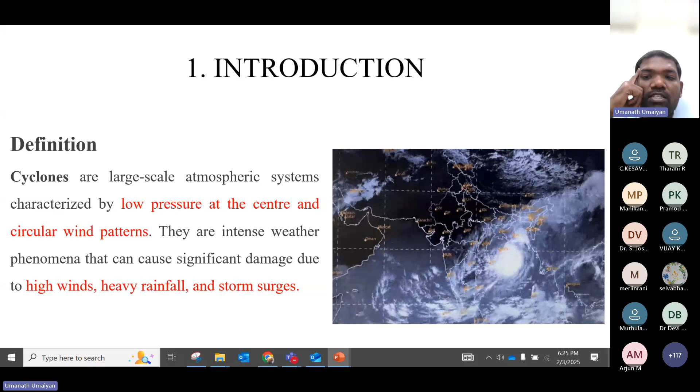This intense weather phenomenon causes significant damage due to high winds, heavy rainfall, and storm surges. The basic is wind, but the byproduct of the cyclone is heavily induced by these three: high winds, heavy rainfall, and storm surges. These three phenomena damage most structures, and we have to think of all three parts from a geotechnical aspect. This is the basic characteristics of a cyclone.

Let me start with formation and dissipation - how it starts, how it's forming, how it is dissipating. Mostly cyclones happen in tropical oceans, meaning where the temperature is mostly more than 26 degrees. Where the temperature is more, there will be evaporation of air.

The pressure of air will go up to the atmosphere, where the pressure will be very low. Where low pressure happens at the top of the tropical oceans, it derives heat and moisture from the oceans. It starts to form as a tropical cyclone, and moves around, dissipating over cooler areas. Wherever it moves to cooler places, you may expect huge rainfall.

So it gives heavy rainfall - imagine, it can give up to 500 mm of rainfall, which will definitely cause flooding and landslides, and storm surges - a rise in sea level. With very forceful and heavy wind force, it will move the waves and make the sea level rise. That is another catastrophic effect.

The low pressure at the center, as I mentioned, is called the eye, and it's surrounded by the eye wall. That is the reason it causes intense wind and rainfall - that's an important point. High wind speed can reach up to 250 km per hour at maximum. Just imagine a 250 km per hour wind attacking your structure or any other material.

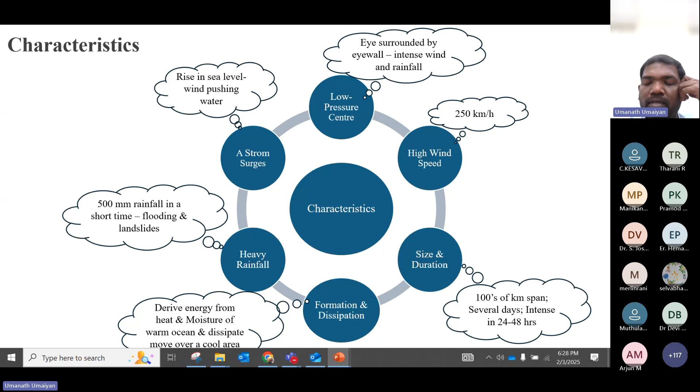Now let us go to the historical damage to structures. I cannot go beyond 50 years back, but just imagine, in the last 50 years alone, India has faced 117 cyclones, which took around 40,000 lives.

So what are the impacts of cyclones? Let us see stage by stage. First, it causes structural damage due to high winds and flying debris. You can see a lot of videos on YouTube and in newspapers and news channels showing heavy wind creating debris that can destroy buildings, bridges, and other infrastructure. That is the main structural damage.

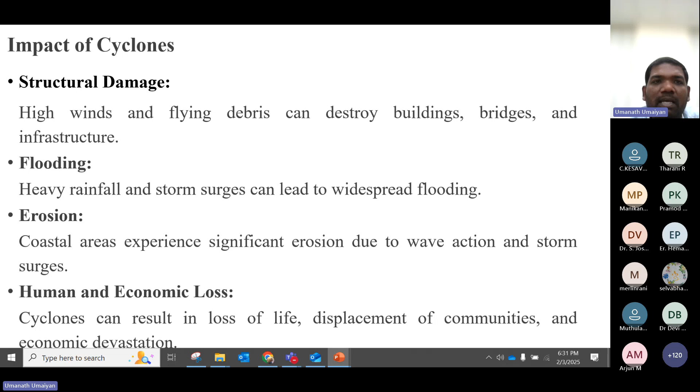So having covered the basic introduction of the cyclone, its characteristics, and its impact, let us move to the technical part: the geotechnical relevance of cyclones. If you hear the term cyclone, everybody thinks of high wind force and heavy rainfall damaging structures, but nobody thinks about how it also affects the subsurface, that is, the foundation or geotechnical aspect. So I am presenting here the challenges imposed by cyclones on geotechnical design.

It starts with uplift forces on the foundation due to heavy winds. In the picture on the right, you can see a transmission tower resting on piles, shown here as a single pile, though in practice there are pile groups too. Because of heavy wind, the transmission tower gets laterally displaced. Due to this lateral displacement, one side of the pile gets settled while the other side gets heaved, because one side is affected by compression and the other by tension. This uplift force acts on the foundation, and if it is not designed for, the transmission tower will fail.

The second important point is liquefaction of soils during heavy rainfall. I'm not sure about the domain of attendees here—probably most people are coming from a structural background and don't understand the terminology called liquefaction. This is a specific term we use in geotechnical engineering, so let me dwell on it in more detail, because I want everybody to understand this very important challenge posed by cyclones: liquefaction of soils during heavy rainfall.

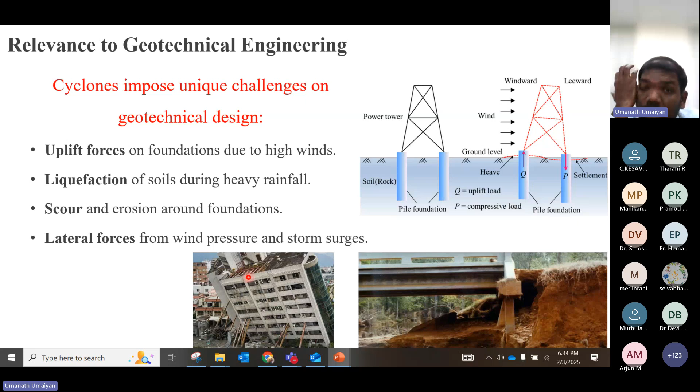The fourth point is lateral forces from wind pressure and storm surges. Any structure that doesn't consider lateral forces—whether a tall structure or any kind of superstructure—will impose uplift or lateral forces on the foundation system. So these four points are the challenges imposed by cyclones in geotechnical aspects.

Let us see one by one. First, to know the impact on geotechnical aspects, let's go back to the types of soil. People might already know the types of soil, but let me brush up the basics. Soils can be defined in the categories of coarse grain soil and fine grain soil.

Any particles retained on a 4.75 mm sieve, meaning more than 4.75 mm in size, are called gravel—we don't bother about that. Geotechnical engineering, or rather soil mechanics, only concerns soil particles passing 4.75 mm. So from 4.75 mm down to 75 micron, it is called coarse grain soil, and here the shear strength is defined by friction angle.

Most particles in this region could be called sandy soil. This sandy soil can be bifurcated into many types: sandy soil, clay soil, poorly graded sand, well-graded sand, silty sand, clayey sand—lots of bifurcations exist. But for now, let me give a broader classification; this much is good enough. So the shear strength is defined by the friction angle. Here is an important point.

Since you're mostly from a structural background, you know about concrete and steel. Concrete is good in compression but very bad in tension. Similarly, steel is very good in tension but bad in compression—meaning each material fails under a specific type of force. Concrete fails by compressive force, meaning axial load, and reinforcement fails under tensile load. In the same way, any type of soil will fail in shear failure, meaning horizontal movement between soil particles, which creates stress until the soil fails beyond a certain point.

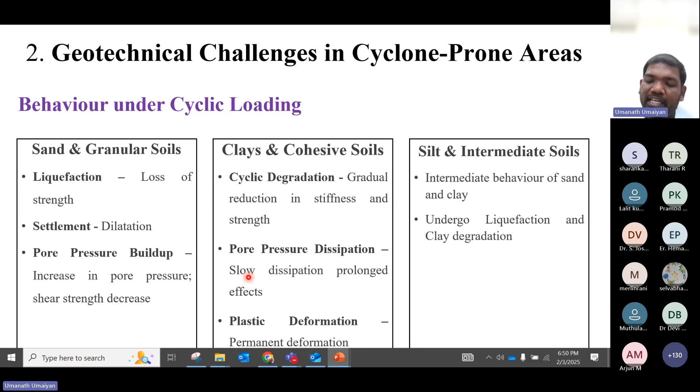Okay, so as of now we have seen the types of soils and their behavior under cyclic loading. As I promised earlier, I am going to explain more about the liquefaction factor here, because this is the point that most structural background people aren't aware of. Fine, so this is liquefaction.

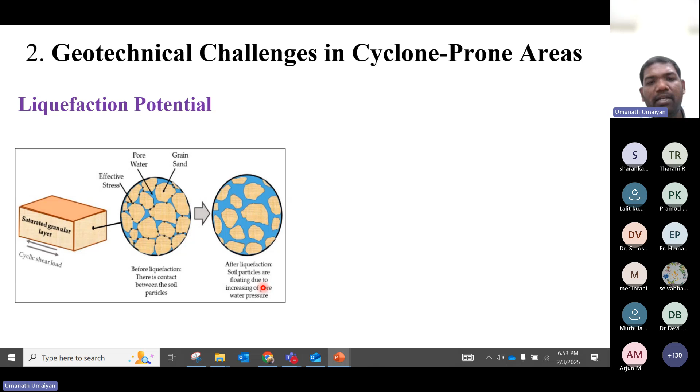Soil particles are floating due to increasing pore water pressure - these are the words I have mentioned. The soil is saturated and filled with water between the voids. During a strong cyclic load, these waves will compress the soil strata. During the cyclic load, all the soil particles try to compress each other because of this wave action. So due to the compressive force exerted by the earthquake waves, loose soil tries to densify, obviously. First, the waves try to compress the water present in the voids.

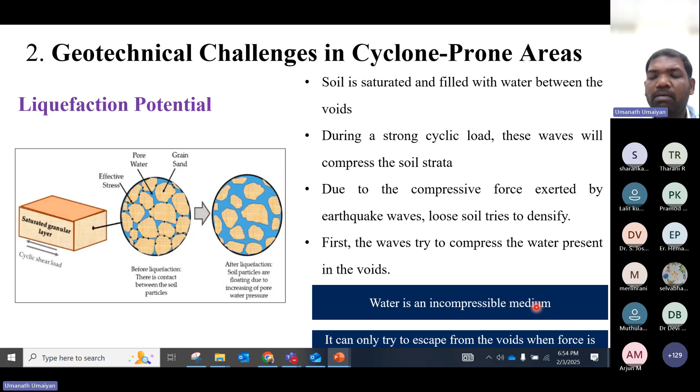This is very common - whatever load happens, water tries to take the first load. But if there is a chance of water to dissipate, it tries to move away, then automatically your soil takes more load. But in the case of cyclic load, there is no way of dissipation for your water, so this is the problem here. The waves try to compress the water present in the voids - water is an incompressible medium, so it won't get compressed. It can only try to escape from the voids when the force is acting.

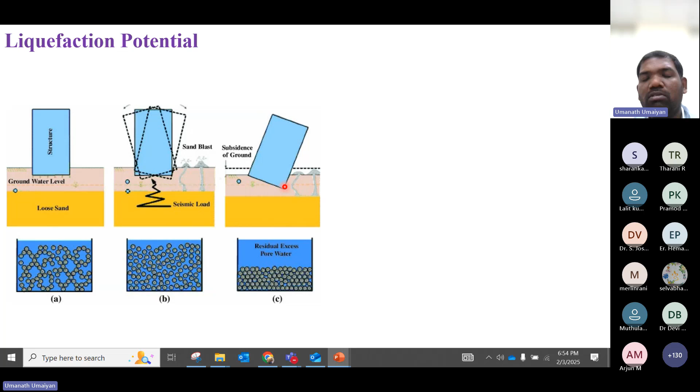And this is another self-explanatory picture. A is actually having loose sand over the groundwater level, with a structure here. In B, there is a seismic load acting on that. What will happen? The soil particles try to rearrange, water tries to move away but doesn't have any opening to escape. Here, residual excess pore water pressures happen, so all the load has been taken by the water now. There is no part of soil particles to withstand the structure, so obviously the structure fails. This is the simple self-explanatory picture here.

So in the words we can see here: water present in the voids cannot escape easily due to its concealment inside the soil, right? Then pore pressure increases and reduces the shear strength, resulting in the reduction of effective stress.

I forgot to put in the equation: effective stress is equal to total stress minus pore water pressure. Just imagine pore water pressure increasing more and more - at some point total stress and pore water pressure will become equal, so it will be zero. Effective stress will be zero, right? Once effective stress is zero, there is no strength available in the soil, and that is how the failure happens. At one stage, pore pressure exceeds the effective stress also, shear strength becomes zero, and the soil liquefies.

And now, here are the effects of liquefaction on the foundation. As of now, we have discussed what is liquefaction, what is the phenomena called liquefaction, and how it is actually generated. Now, we will see the effects of liquefaction on the foundation.

There are four major effects on the foundation. One is uplifting of structures. Once the soil gets liquefaction, there will be a buoyancy effect. If your structure is huge or a high-rise building, there is a possibility of settlement. But if your structure is lightweight or featherweight, the water buoyancy may cause uplift of the structure. This is very common in underground structures, any structure buried underground like pipelines or manholes - it will get uplifted because of the buoyancy effect of liquefaction.

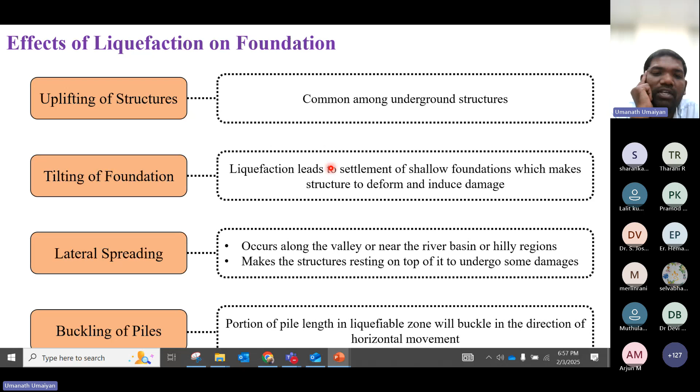Then buckling of piles - this is a very important thing, and I will explain with a picture in the coming slides. Now let's see one by one.

First is uplifting of structures. Buried structures will undergo flotation and lead to damage, imposing upward buoyant forces on the structure resting over it, as I explained earlier. You can see this picture here - the confined water is trying to find a way out. Once it finds the way out, all the water present in this layer will join with the groundwater level, and being overall covered by water will give the buoyancy effect to your structure.

If a structure is strong enough to counteract the buoyancy effect, it will withstand it. But if your structure is lightly loaded, it will definitely have this kind of uplift effect. This causes a lot of damage to underground buried pipelines - water pipelines, oil pipelines, electrical line pipelines, broadband pipelines, whatever buried structures - causing a lot of damage to underground structures.

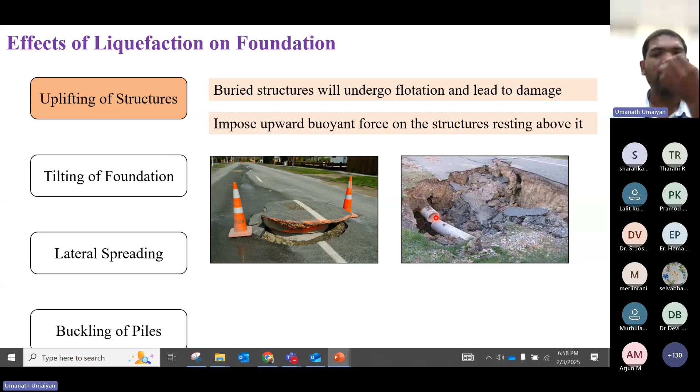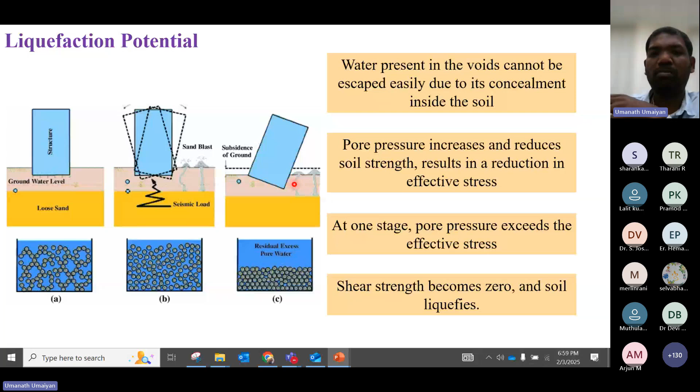You can take this example here - you can see settlement happening on one side because the water tried to go away in one direction. If it moves in all directions, the foundation may settle uniformly, but we cannot predict that. So where there is a small gap, water tries to come out, and this kind of failure makes your foundation tilt. This tilting of foundation leads to huge failure of the superstructure, even in 20 to 30, 30 to 40 story buildings.

Then lateral spreading - this is the finite lateral displacement of gently sloping ground. As I mentioned, this happens where the slope is gentle, due to pore pressure buildup or liquefaction in a shallow underlying deposit during an earthquake. Imagine there is a layer with a small thickness like 300 to 400mm in a gentle slope - due to the pore pressure, that particular portion alone comes out of the subsequent stratification, like a piece of cake.

That particular portion of 300mm fails, called lateral spreading. It causes damage to the foundation of buildings, pipelines and railway lines, and causes shaking in piles due to lateral loading.

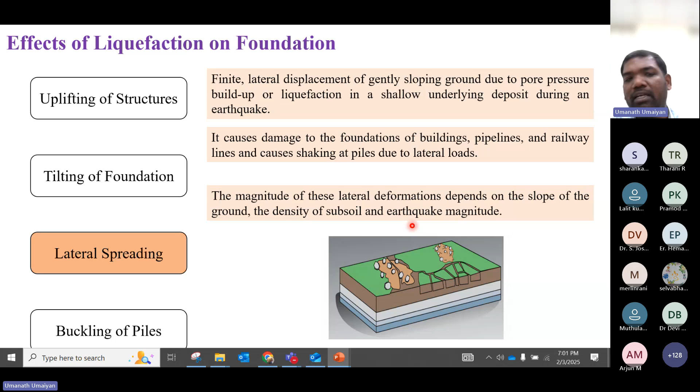The magnitude of this lateral deformation depends on the slope of the ground, the density of the subsoil, and the earthquake magnitude. If my slope is very steep, the failure will be more - more chance of failure. But if my slope is very gentle, like a 1 is to 1.5 slope, there's less chance of lateral spreading. Density plays a major role here, and earthquake magnitude too - even a 1 is to 1.5 slope can fail if the magnitude is more than 8 or 8.5. These are all the factors governing lateral spreading damages.

Then buckling of pile - that is a very important or fascinating thing.

Just imagine, let me read out these points. The liquefiable layer loses its strength during strong motion, as we discussed earlier. Then the pile moves in opposite directions above and below the bottommost non-liquefied layer. This induces buckling of piles and leads to damage to the superstructure.

You should understand the possibility of liquefaction potential of the soil at various stratified layers, because soil is not a uniformly homogeneous material. It may have stratification up to 2 or 3 meters, a different type of soil layer from 2 to 4 meters, and you cannot expect the same from 4 to 6 meters. Soil has a proper diversity, unlike concrete or steel, which are man-made materials.

If you want to construct a building with M30 concrete, you can make M30 concrete because you have all the data to create it, and it will give a strength of M30. But in the case of soil, it doesn't have such uniform behavior throughout the depth. That is called stratification.

In this case, imagine there is a 2 meter depth of non-liquefied crust, and after that another layer which is very loose, liquefiable sand. Then again it starts the non-liquefiable sand. So if any cyclic load happens, the liquefiable soil starts to get liquefied.

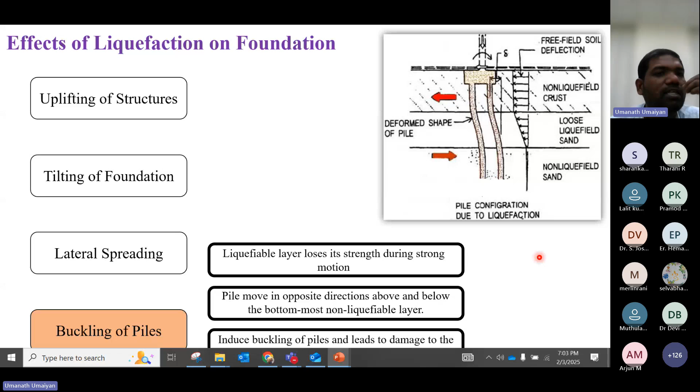So there are a lot of problems, effects, or failures that happen because of liquefaction. I am just listing out a few points here. We have seen uplifting of structures, tilting of foundation, lateral spreading, as well as buckling of piles.

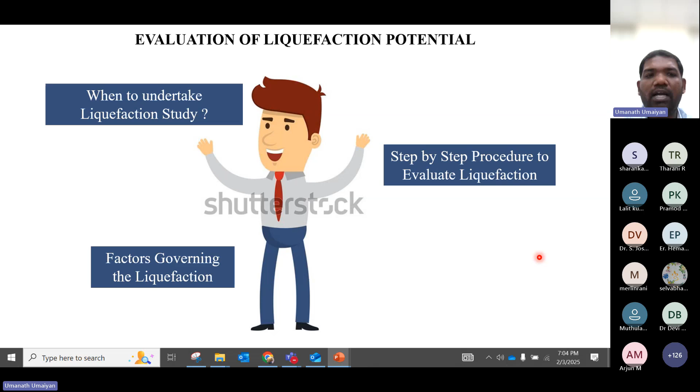Now, evaluation of liquefaction potential. This is a very big topic, and I don't want to take up the whole evaluation process of liquefaction potential. I'm just giving a glimpse of it: when to undertake a liquefaction study, the step-by-step procedure to evaluate liquefaction, and the factors governing liquefaction.

So first, what are the factors governing liquefaction? Magnitude of the earthquake, whether it is 6, 7, 7.5, 8, or 8.5. Strong ground motions are needed to induce liquefaction. If your magnitude is 5, I don't think there would be liquefaction, but if it is more than 7.5, yes, there is a high chance of liquefaction. If the magnitude is low, it may not trigger ground motions strong enough.

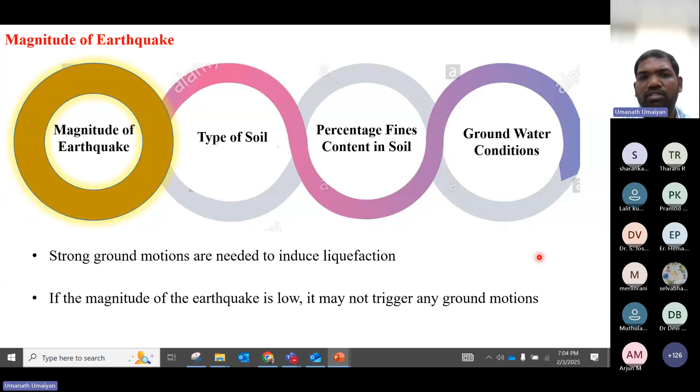Then, type of soil strata dictates the liquefaction potential of sites. If I were in person, I would have asked this question to the audience, but now I cannot. Let me ask and answer it myself: what type of soil is actually highly prone to liquefaction? Just think about it, recollect the lecture I've given so far.

Okay, those who say sand is more prone to liquefaction, give applause to yourself, because sand is the type of soil most prone to liquefaction, not clay type soil. So obviously, type of soil definitely influences the liquefaction potential.

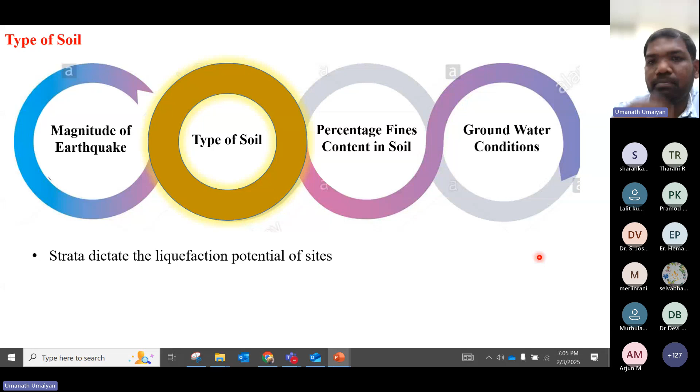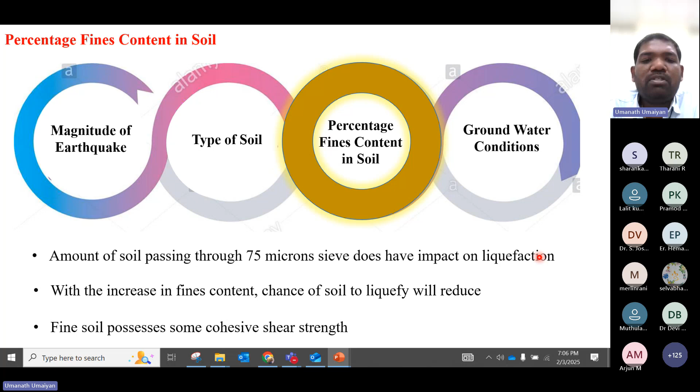Then, percentage of fines content in the soil. Soil passing through a 75 micron sieve does have impact on liquefaction. So if the fine contents are more, like even if I have a sandy soil but the silt or fines content is more, say 20 to 30%, that soil doesn't have proper potential for liquefaction. With an increase in fines content, the chance of soil to liquefy will reduce, because fine soil possesses some cohesive soil strength, shear strength. Then, groundwater condition.

Groundwater condition plays a major role here. Depending on the saturation condition of the soil, liquefaction may or may not occur. In dry soil condition, where the water table is at a greater depth, liquefaction will not govern, right?

Let me add one more point. For liquefaction to be induced, your soil needs to be saturated. If it is saturated, your pore water pressure will build up. But just imagine, in your substructure or subsoil up to 10 or 15 meters, there is no groundwater, maybe in a dry, arid area there is no water table until 10 or 15 meters. Even if there is sandy soil, even if it is very loosely packed soil...

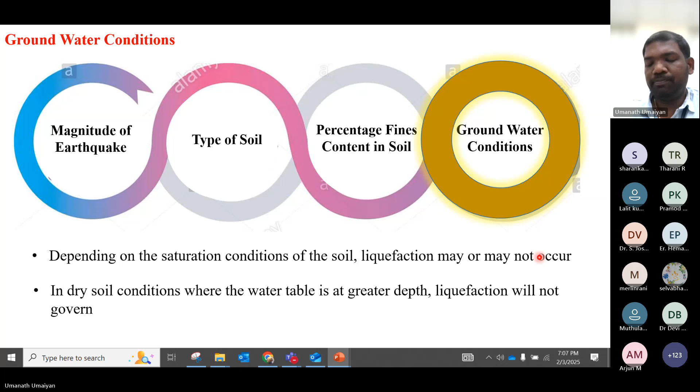If cyclic load attacks, there is no chance of liquefaction happening here, because there is no water present at that particular depth. So there won't be any pore pressure development. Groundwater condition is an important factor to assess liquefaction. These are all the governing factors.

Now, when to carry out the liquefaction study and how to carry out the liquefaction study - I am not giving the how, I'm just giving the when, right? So first, the high chance of liquefaction happening is in poorly graded, loose, saturated sands.

I give three scenarios here. First, it should be poorly graded. Poorly graded means uniformly graded. People who have done soil mechanics lab might know this terminology, which means a particular soil particle size is predominant in that soil mass. For example, I'm having 1 kg of soil in hand. In that 1 kg, almost 80 to 90% of soil particles are the same size, like 3 to 3.5 mm. If that is the case, that is called poorly graded.

Why does poorly graded soil have liquefaction potential? Since it is poorly graded, the interlocking between particles will be very less. So since the interlocking is very less, there is a high chance of voids being present. If it is a well graded soil, all the particle sizes will be present, so smaller particles will occupy the gap created between two successive bigger particles, so there won't be any voids. If there won't be any voids, then there won't be any water. If there is no water, there is no pore pressure buildup. If there is no pore pressure buildup, there is no chance of liquefaction.

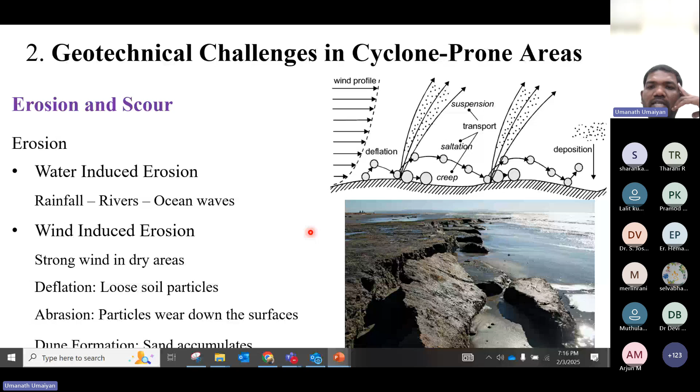Then general scour, which affects entire riverbeds or coastlines due to natural water flow. This is the example here I have put. This example can be taken for both erosion as well as general scour.

And contraction scour, where heavy speed water from streams like rivers or other running water moves through a narrow section. What will happen? It will actually take all the material around the surrounding structure. That kind is called contraction scour.

Then wave induced scour, because of ocean waves and tides leading to coastal erosion. And tidal scour, because of the tides, it actually scours a lot of the shore.

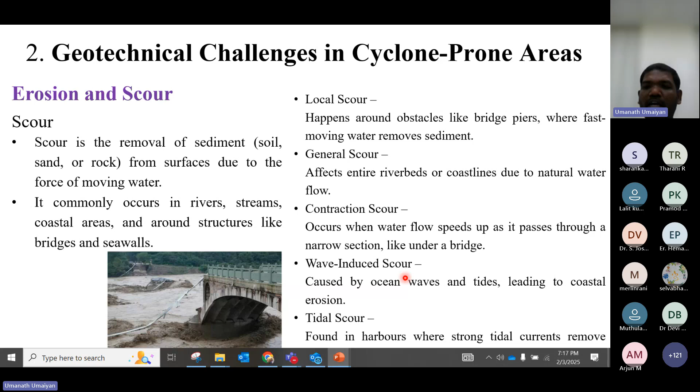Let us put it in simple words. If you take the surrounding soil out of any existing structure, it loses its supporting lateral resistance, and your structure is going to fail. So in simple terms, scour removes the sediments around your structures or foundations, which automatically makes it fail. Simple.

Then effects on foundation by scour. Since it is a geotechnical consideration, I should talk about foundation, not the superstructure, right? So first, loss of support, loss of lateral and vertical support of the foundation, leading to instability.

Then settlement. The foundation may settle unevenly as the soil beneath it is eroded. Once the soil beneath the foundation is removed by scour, obviously the foundation gets settled. Once the foundation gets settled, the building fails.

Then reduced bearing capacity: the foundation's ability to carry loads decreases as the soil is removed. Then structural failure: severe scour can lead to tilting, cracking, or collapse of structures. These are all the effects on foundation by scour.

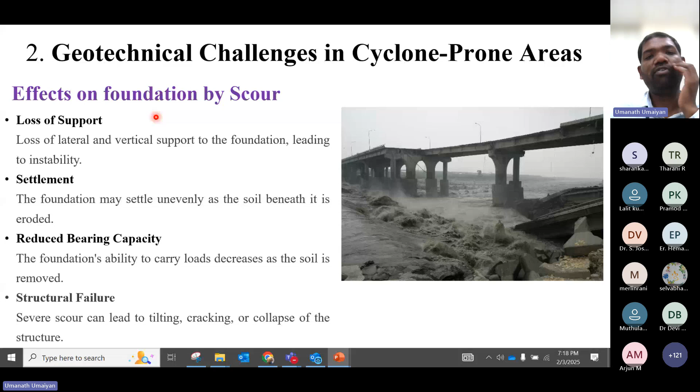This scour is actually given by the cyclone, right? That shows how the soil properties influence the structural stability. As of now, we have seen what dams and considerations should be given for cyclone prone areas, and what damages it will create. We have seen in detail the damages like liquefaction, erosion, and scour.

Now, how do soil properties influence structural stability? Soil properties such as shear strength, compressibility, and permeability determine the foundation's ability to support loads and resist deformation. These three properties, shear strength, compressibility, and permeability, are known as engineering properties.

Soil properties can be divided into two: one is index properties, another is engineering properties. Engineering property is nothing but the property which affects the structure above your soil. Let me put it in simple terms.

Shear strength is obviously governed by the angle of internal friction and cohesion. The soil has its maximum shear strength; once it loses shear strength, the building fails, right? So shear strength needs to be more to keep your structure intact. It is a direct proportion: shear strength is more, structural stability is more.

Next, compressibility. Compressibility is the ability of your soil to compress. If you are able to compress your soil more, it means your soil is in a loose condition, very soft in nature. So your soil should not be more soft or less dense; it should not compress more. So it is an indirect proportion to your structural stability. If your compressibility is more, structural stability is very less.

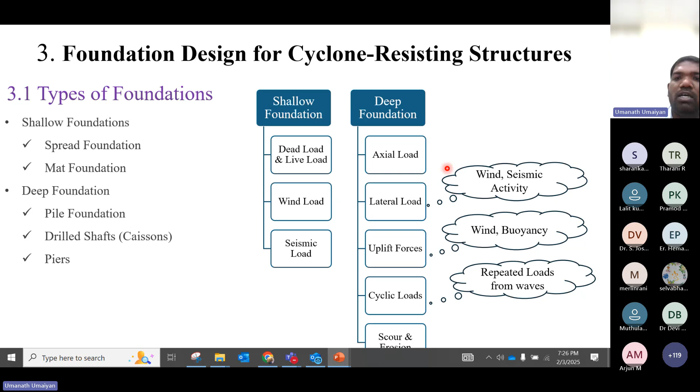Wind and seismic activity will give a lateral load here, and wind and buoyancy effect will give the uplift forces, and repeated loads from the waves give the cyclic load to your deep foundation. So if you want to design a proper deep foundation, you have to consider all these loads, especially these three loads in cyclone prone areas.

Now, at what point or for what structures do we have to consider the wind load? The wind load must be considered in the following situations. Tall structures, buildings or towers with height to width ratio greater than 4, categorized as tall structures - to design the tall structure, you have to consider the wind load.

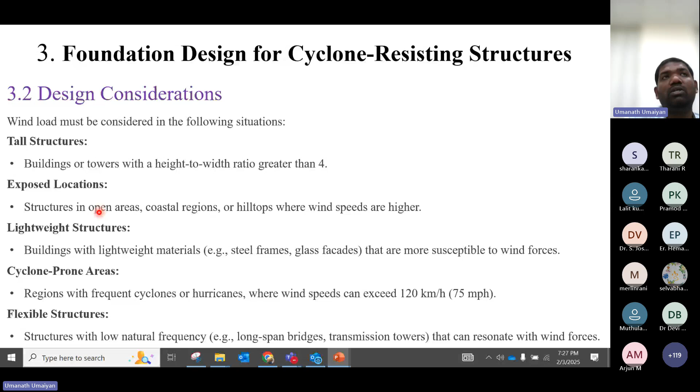Then exposed locations - in open areas with no structure at all, but you are constructing a high-rise building like a 20 or 30-story building. In such open areas, the wind force will directly hit your structure. But if your structure is one among 20 to 30 structures, the wind load will be shared, so the effect will be divided 1:20.

The same goes for coastal regions and hilltops where wind speeds are higher - these are all exposed locations where you have to consider the wind load. Then lightweight structures, buildings with lightweight material, steel frames or glass facades, are more susceptible to wind forces. Then cyclone prone areas, regions with frequent cyclones or hurricanes where wind speed can exceed 120 km per hour - in this area, you have to consider the wind load for your design.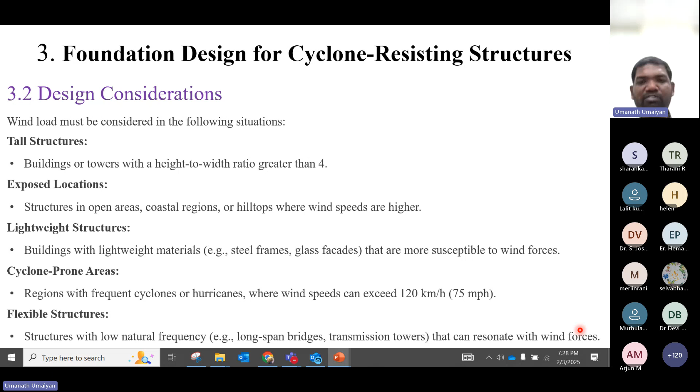Then flexible structures, structures with a low natural frequency, long span bridges, transmission towers that can resonate with wind forces. If you've followed my presentation from the beginning, you'd have heard about the natural frequency of the structure in the initial slides. If your structure's natural frequency is very low, it can resonate with the wind force, and if both frequencies resonate, the impact and failure will be more. So for flexible structures with low frequency, you have to consider the wind load also.

Now coming to pile design. In the geotechnical part, we are not designing any structural part of the foundation or pile, meaning we are not calculating the area of reinforcement, number of reinforcements, or spacing. Those things are not considered in geotechnical area. Here, the foundation design mainly gives the bearing capacity and load capacity of the particular pile.

IS 2911 gives two categories of load capacity - axial load and lateral load capacity. I don't want to discuss axial load since it's very common, and for cyclone resisting structures we obviously consider axial load, but the lateral capacity of the pile must be considered. That's why I have put only the lateral capacity of the pile.

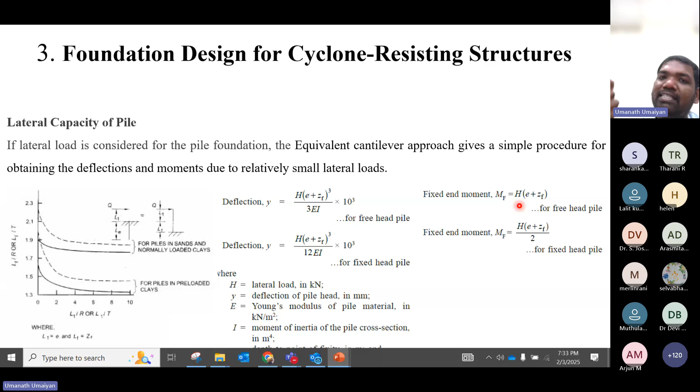That's all. So you have to see this H is equivalent to the expected wind load from the expected cyclone on a particular location. Simple. So that is for your lateral load.

Now uplift capacity - how we can actually calculate the uplift capacity. Again, this is not like your lateral displacement or lateral capacity. Uplift capacity cannot be calculated using any analytical method. It is a simple site investigation.

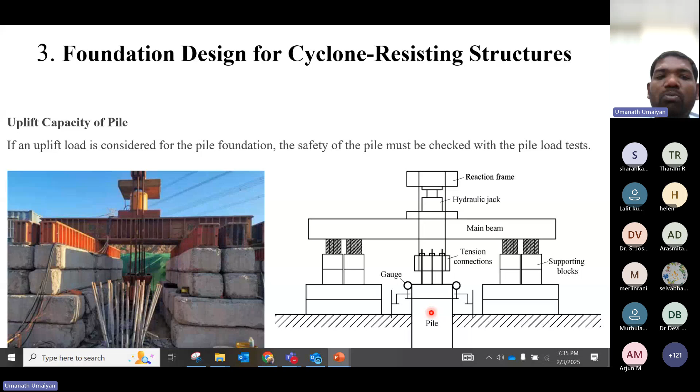You have to go for a better pile, which means you have to improve the diameter and the length. By increasing the length, you may expect more resistance from your frictional resistance. That is a different part of pile calculation. Fine, so this is the piling criteria.

So the loading should be applied in increments of 20% of the estimated safe lateral capacity, and the next increment should be applied after the rate. These details you can find in the code.

This is how to apply the load for the lateral load test. Now, the point you should keep in mind is 5 mm is the allowable lateral movement for any pile foundation. That point is enough for you to understand.

Now, what are the failing criteria for the pull-out test? For piles up to and including 600 mm diameter, it is 2/3 of the load at which the total displacement is 12 mm, or the load corresponding to the specified permissible uplift. Sometimes a particular site may give a specified permissible uplift limit other than 12 mm, so you can calculate that also, or else you have to take your pile's safe uplift load as 2/3 of the load which makes your pile displace 12 mm.

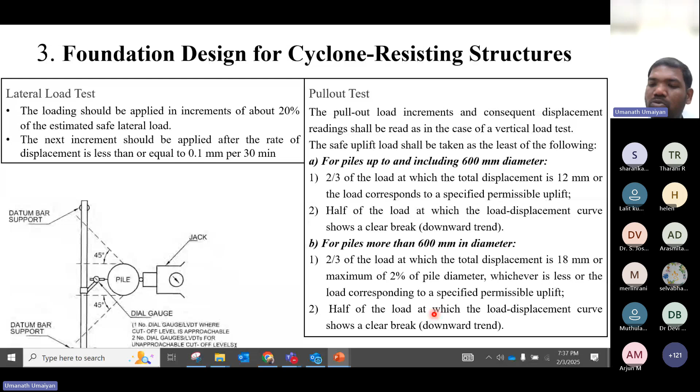As of now, we have discussed the effects of cyclone on the geotechnical aspect as well as structural aspect, the tests to be done, what foundations to be designed on what aspects, and the important specifications to be considered for design of foundation to mitigate cyclone effects.

Now, everything is considered, foundation has been done. My area is a cyclone prone area. Now I am going to construct a structure on that, but my soil is not that good. I can improve the soil - that is ground improvement.

Now let us see, not going for ground improvement, at the foundation level what mitigation steps I can take up, how to overcome these issues. Use better materials and quality of concrete, corrosion resistant material in coastal areas, and anchoring and bracing of foundation.

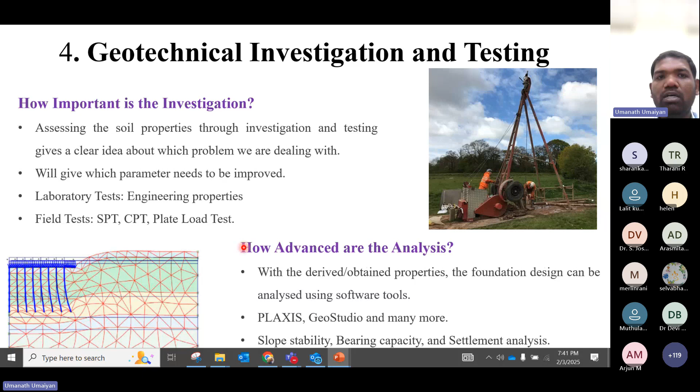So everything depends on your investigation. If you do a wrong investigation, you will get wrong input parameters, and that will lead to a misleading analysis. So even though analysis methods have improved a lot, everything still depends on the investigation. You have to do the investigation properly.

Then, mitigation strategies and best practices. Liquefaction and a lot of other soil problems can be imposed by a cyclone. So how can I mitigate this? The basic approach is soil improvement technique - you have to improve the soil, like better compaction, grouting using cement or other chemical products. There are many chemical products available for grouting and soil stabilization. Soil stabilization includes anchoring, bracing, and geosynthetics. All these things improve your soil's compaction, which automatically improves your bearing capacity.

Then, use of geosynthetics and reinforced earth - this is another huge topic that I hope to cover with you in future collaborations. So this soil improvement technique actually mitigates liquefaction or cyclone-prone problems.

Then, early warning systems - the role of meteorological data in cyclone preparedness. You have to keep an early warning system in place so you know a cyclone is going to happen. That early warning helps make you ready for structural stability in many ways, and integrating early warning systems into design keeps your structural stability intact.

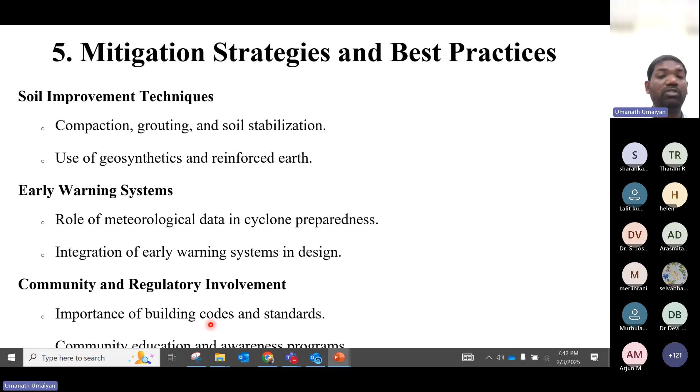Then, community and regulatory involvement - the importance of building codes and standards. You have to stick with building code standards. If you compromise on that, you will definitely compromise on structural stability, which can lead to huge fatal accidents. I think that's all from my side. Thank you, ma'am.

Sir, thank you for your wonderful presentation. Thank you, ma'am. Thank you. Participants, any questions? Faculty members, kindly ask your doubts. If you have any queries, please ask.

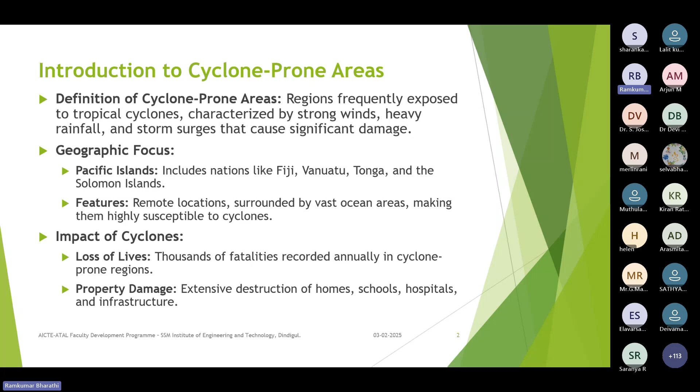Mainly, the cyclone-prone areas are affected by economic impacts. The first thing is fatalities and health issues, then second is economic impacts - disruption of tourism and agriculture industries, and long-term recovery strains national economies. This mainly involves decreasing currency value, inflation, and export-import issues - the main problems occurring particularly in the Pacific Islands.

The importance of resilient infrastructure is to minimize damage and enhance recovery of the country, protect lives and livelihoods, and support sustainable development and economic systems in vulnerable regions. So what the consultant is proposing in the feasibility studies are key factors to consider for these projects - which countries are mainly affected by cyclones and sometimes earthquakes. These are the key things considered for feasibility studies in developing nations.

Everyone is aware about port warning signals. Once a cyclone is developing, using satellite images and satellite constellations, the meteorological department will provide data on the crossing and cyclone impact and dangers. Then visual storm warning signals will be on signage permanently hoisted at the ports to alert ships of weather conditions in the ports they approach.

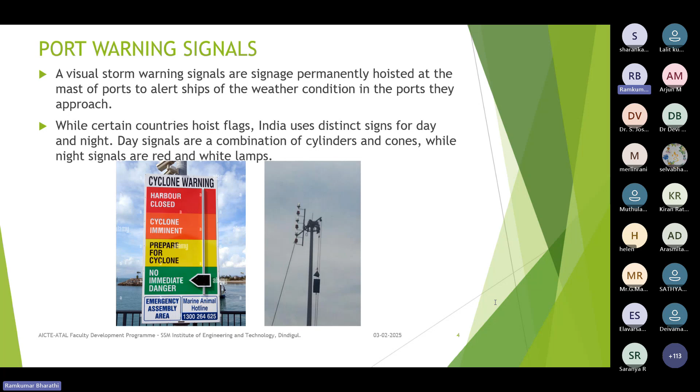So the signal flags or numbers you are seeing are used following practices in southern countries, India, Southeast Asia, Australia, New Zealand, and the Pacific Islands. There are signals 1, 2, 3, 4, and totally 11 signals in all. Signals 1 and 2 indicate a low pressure depression at sea, but the port is not yet affected.

A depression forms somewhere, and later it develops further. We then come to know about the cyclone, its movement, where it is going to cross, and which area will be affected. All this becomes clear over a later period.

Once a depression forms in the sea, we immediately raise the flag, or there will be rings or a cone shape raised at the port. In the Pacific Islands, unlike India which has many major and minor ports, there is only one port per island. Even in New Zealand or Australia there may be many ports, but in the islands there is typically just one, so they raise the flag or the cones there.

This signage lets people and the sailing team know that a depression has formed in the sea. Once the signal changes to 3 and 4, that indicates bad weather, meaning there will be very heavy rainfall and wind. These signals are categorized according to the wind speed of the cyclone.

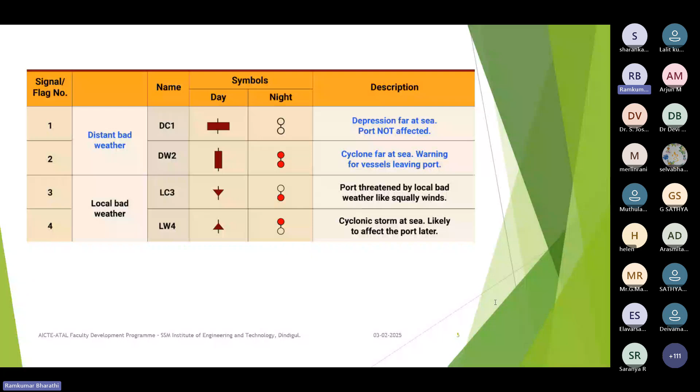Signal 5, 6, 7 means the cyclone is likely to cross the coast, near the port but not exactly at the port. Once a signal is raised to 8 or 9, it means great danger - a severe cyclone is about to cross the coast, left or right. But signal 11 is very severe.

I will share some past cyclones which crossed up to signal 10. Once signal 10 is raised, the flag is fixed on the high mast and the port is immediately shut down, meaning the country is in severe danger from the cyclone.

All the alert teams and local evacuation teams are mobilized, and other countries' aid will be present. Defense forces as well as local police are deployed to evacuate people from the coastal areas. In some islands like Vanuatu, people are completely evacuated from the country because it's a very small island.

Signal 11, in my experience, I've not seen - most often at signal 9 and 10 the meteorology department declares the country to be in a severely dangerous condition. So mostly all the preparations are implemented and evacuations begin in time.

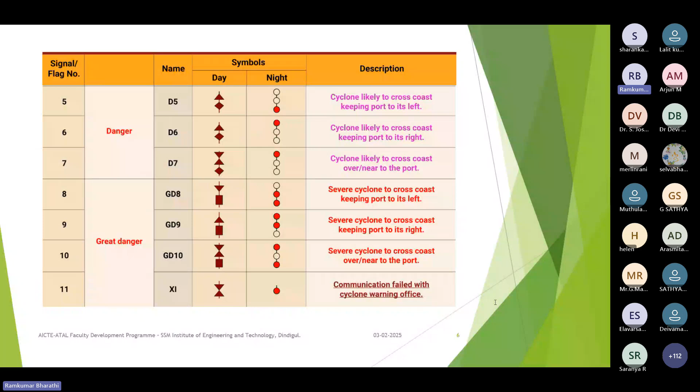Now for the challenges in cyclone prone regions. The Pacific Islands are a completely remote geography area - each island has little link between developed and developing countries. Being completely remote limits their resources and funding. Most Pacific Island countries now do get funding for cyclone prone regions since feasibility studies have been done, but even so, the funding is very limited because there is little access to these Pacific Islands.

There are a lot of local resources and local funding teams, but proper funding is not available in particular islands because some countries need aid to develop that.

The vulnerable ecosystems in some areas have no access, even in cyclone prone regions. If one cyclone affects a region, we cannot access that particular area because sometimes the airport is completely damaged, then there is no access.

Some trees may fall, electrical poles may fall, and sometimes the port and harbor structures may be affected due to the cyclone. The damage may be severe, with no berthing area for vessels, and highways may be damaged. Many things are affected.

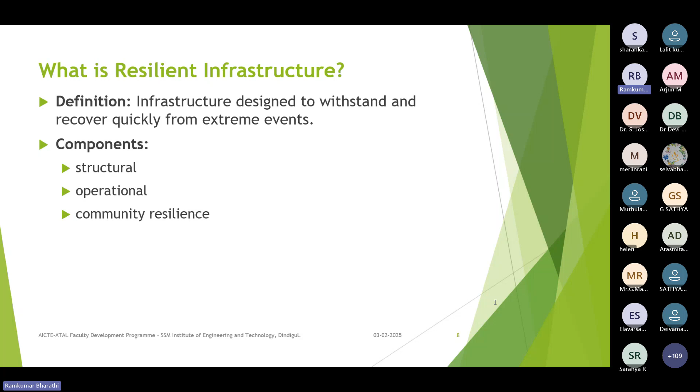So engineers need to consider the components of structural, operational, and community resilience, particularly when preparing feasibility studies for resilient infrastructure. Consulting engineers need to consider those infrastructure opportunities.

The principles of resilient infrastructure are robustness, redundancy, resourcefulness, and recovery. Robustness is mainly the ability to withstand extreme winds, flooding, and storm surges without significant damage.

For example, if we are constructing reinforced concrete structures, they should be on elevated foundations. Most things should be on elevated foundations. Sometimes after a cyclone, port and harbor structures experience severe erosion.

Redundancy is incorporating multiple layers of protection to ensure continued functionality during disruptions, for example backup power systems and alternate evacuation routes.

For example, something happened in Japan due to one cyclone—I forgot the name—which severely affected a particular region, Fukushima. In that region, there was no power backup, but there was a nuclear power plant. Due to the complete power shutdown, the plant was unable to cool, so radiation was emitted over that area. These are examples of redundancy in resilient infrastructure.

So engineers or consulting engineers need to consider these factors when designing structures. Then resourcefulness is the efficient use of available resources, particularly local resources, and quick adaptation during emergencies, for example modular construction techniques and locally sourced materials.

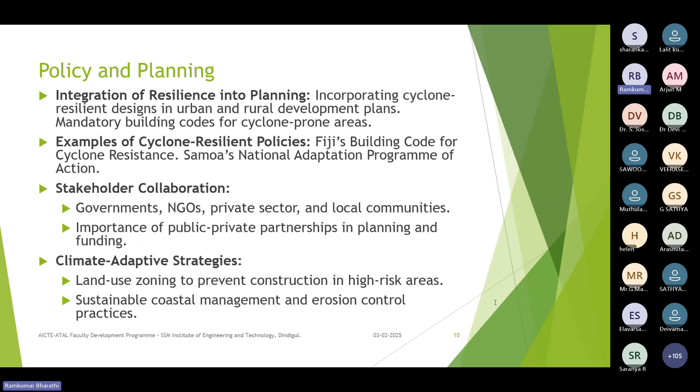So elevated structures always escape from cyclone resilience issues, because there isn't that much flood in that area, but there is severe wind. Wind is always at least minimum in a normal wet season, in dry condition we can expect around 40 to 50 kilometers per hour wind in Pacific regions because of the tropical weather conditions.

For wind resistant designs, nowadays many countries are giving aid for developing wind turbines. They are supporting wind resistant design mechanisms like windmills and ocean energy.

Flood proofing mechanisms involve extending the rivers and removing river shoals so there is free flow of water. Hydropower electrical dams are being constructed particularly for flood proofing in the rivers, helping to control flooding during cyclone season, which usually runs from June to April the next year in Pacific countries.

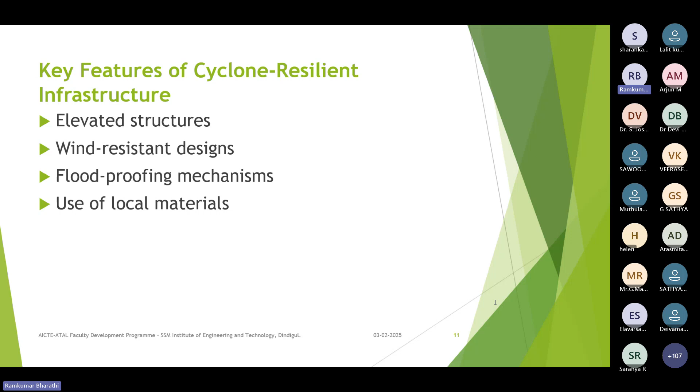The design features include houses built with reinforced concrete frames and cyclone-resistant roofs. These cyclone-resistant roofs are completely different in design because they have reinforced bolts and nuts which were connected up to the foundation.

The elevated foundations mainly mitigate flood risks, and use locally available materials to reduce costs and ensure cultural appropriateness. Once a cyclone crosses or destruction happens, inflation rises and the currency is reduced, so other developing nations give a hand to redevelop the countries. If we order materials through a procurement team, it's very difficult because it takes around 30 to 40 days to reach the material if ordered from Australia, New Zealand or other countries, since this is a completely remote location. So that's the main key thing we need to consider - most countries use locally available materials, and in exceptional cases ask for help from other countries to redevelop.

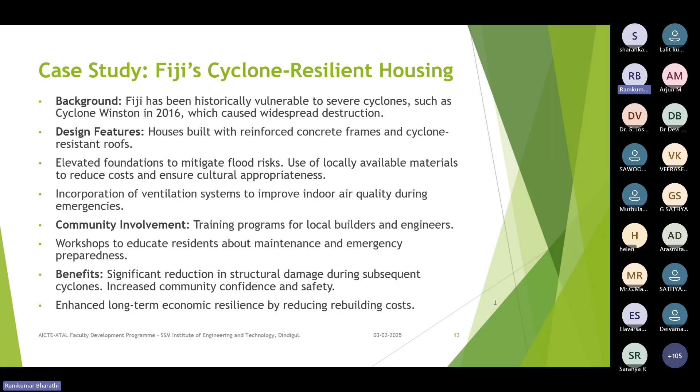Then on the structural side, there's significant reduction in structural damage during subsequent cyclones and increased community confidence and safety. This enhances society together, enhancing long-term economic resilience by reducing rebuilding costs. Some buildings may be considered for reinforcing structures, but this is not cost effective for the country, so most of them are deforesting and constructing houses with wooden structures.

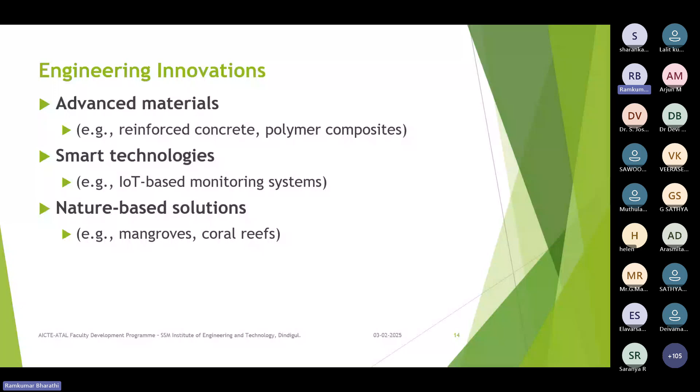So for engineering innovations, we need advanced materials to overcome this issue - things like reinforced concrete and polymer composites. In some countries, reinforced concrete may not be adopted because it's not cost effective. Then smart technologies like IoT-based monitoring systems, and nature-based solutions, for example mangroves and coral reefs. These solutions will all be helpful to overcome issues in cyclone-prone areas.

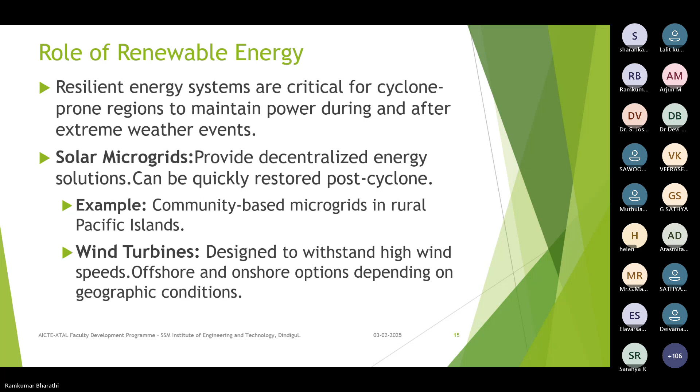Innovations are still going on by the Australian government, and we at Mecanol already developed some systems and studied feasibilities in the Pacific Islands. I'm part of that hybrid systems development, searching the feasibilities, because even if you take any one island group, there are thousands of islands.

Around only 10 to 15 islands can have people living there, but the rest of the islands are completely ecosystems surrounded by coral rocks. These areas are completely prohibited for development due to economic and ecological conditions, since environmental impact assessments are done by the government.

The key benefits are reduced dependency on fossil fuels and ensured power availability for critical services like hospitals and communications. Usually during cyclone times, due to higher wind speed, power disconnection is very common in the Pacific Islands, so hospitals and government buildings have their own power generation like solar, which they are using at present.

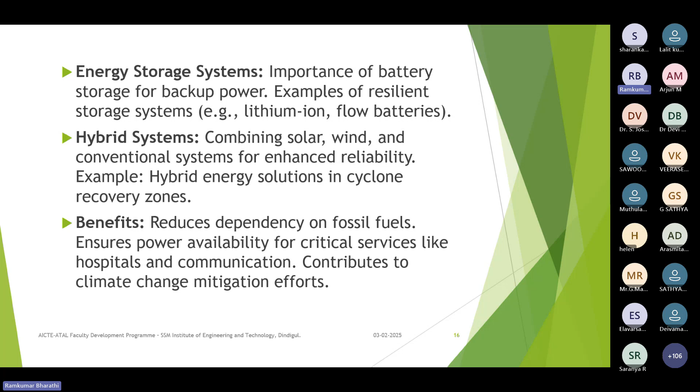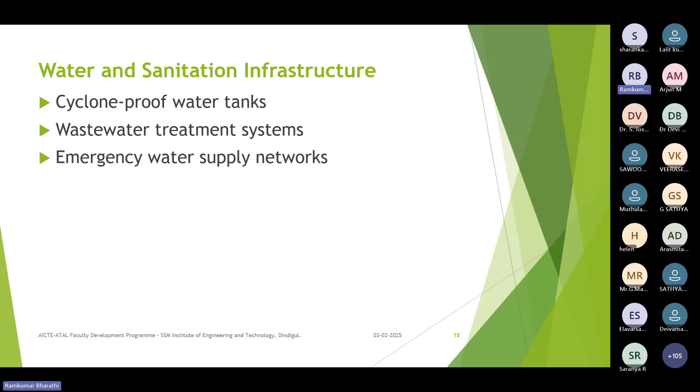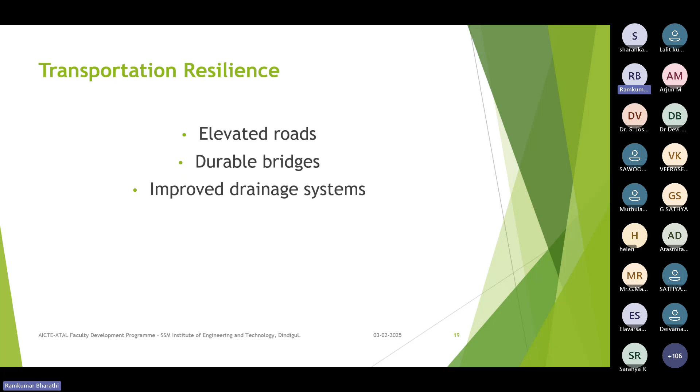Communication systems are a main key issue in the Pacific Islands because sometimes radio signals may not work due to conditions. Communication towers already exist, but during cyclone time they get completely damaged. Now they are rebuilding, but backup satellite systems are now working.

The SpaceX company already has Starlink, which has given a hand to the Pacific Islands for developing satellite systems. In all the Pacific Islands nowadays, they are using Starlink for internet as well as network, since mobile network towers may still sometimes be damaged during cyclone time. So most people are using satellite phones.

For community alert systems, countries are developing local radio signals. Sometimes they announce warnings or raise a flag hoisted on a tower so everyone can see that a cyclone has formed in the sea. These are all very easy ways to communicate with people, reaching them easily to protect their lives.

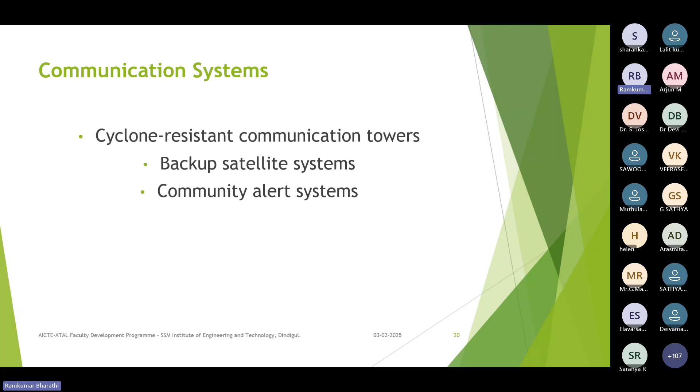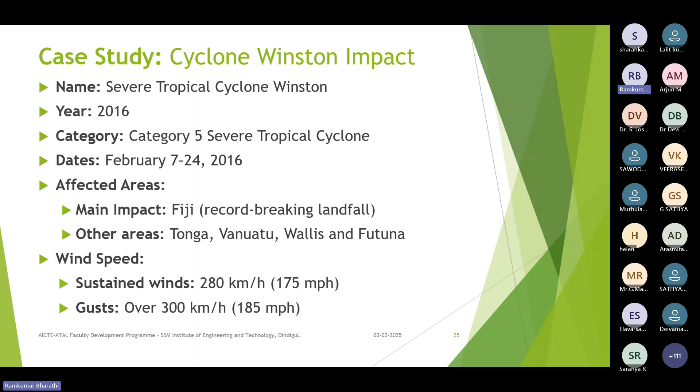Even in India, most cyclones make landfall around 120 to 170 kilometers per hour, sometimes in Visakhapatnam recorded around 210 kilometers per hour. But in the Pacific regions it's entirely different—at minimum landfall may be around 210 to 250 kilometers per hour, sometimes 280, as with cyclone Winston at 280 kilometers per hour. These are all very cyclone-prone areas which are redeveloping, and research is still ongoing to help these nations overcome cyclone-prone conditions.

The cyclone Winston's pressure was 884 hPa, the very lowest recorded in the southern hemisphere. The damage was around 1.4 billion US dollars, and the death toll was around 44 confirmed fatalities.

Cyclone Winston was the strongest cyclone to make landfall in Fiji's recorded history. It flattened villages, displaced tens of thousands of people, and caused very severe economic and social disruptions. Even India, the Australian government, and the New Zealand government supported efforts to overcome this severe destruction in the Fiji region.

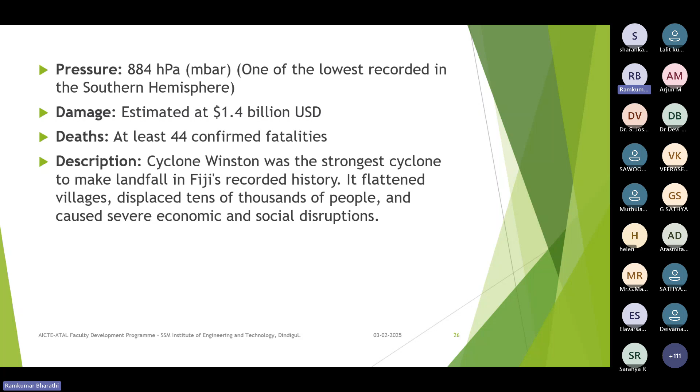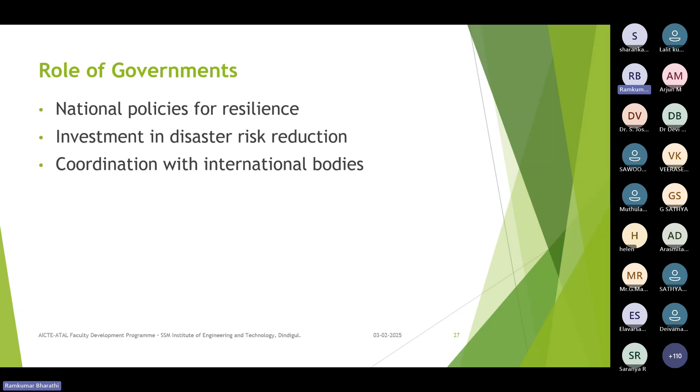In cyclone-prone areas, the main key role of the government is national policy. Still, some countries are revising their policies for resilience, including public-private partnerships for investment and disaster reduction. But nowadays there is very little investment in disaster risk, and coordination with international bodies like the United Nations is still supporting resilience infrastructure. Even associations like the Institution of Civil Engineers are giving a hand and doing research studies, coordinating with local governments in the Pacific and Atlantic regions.